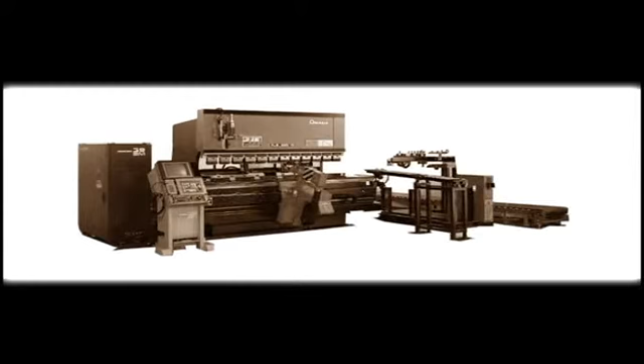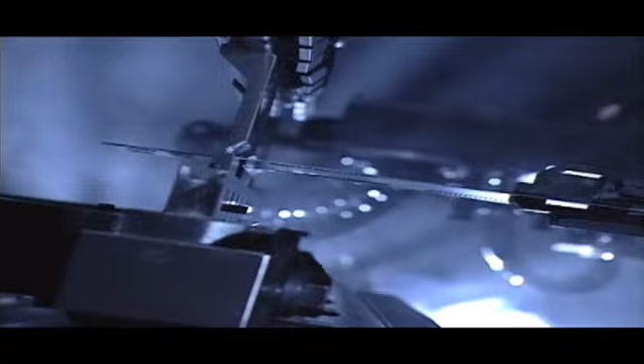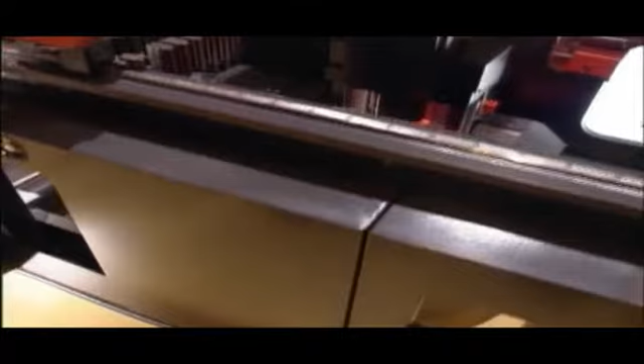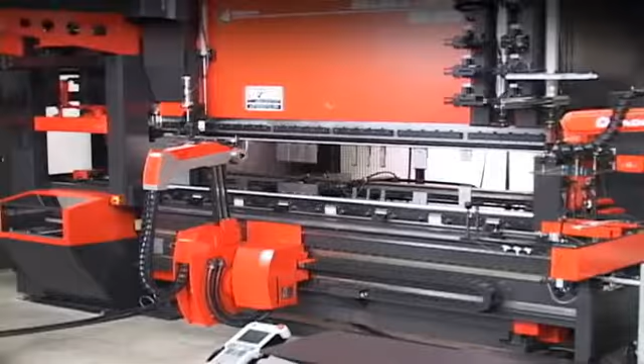20 years have passed since the release of the Bend-O-Matic BM100. It is this bending robot system, developed by Amada, that has brought about a revolution in the bending field by automating the bending process. This process used to rely on a worker's hunch and skills, and has evolved into a networkable, more automated system. In 2006, the core of BM100 was reborn with significant changes, creating the Astro II 100NT cell.

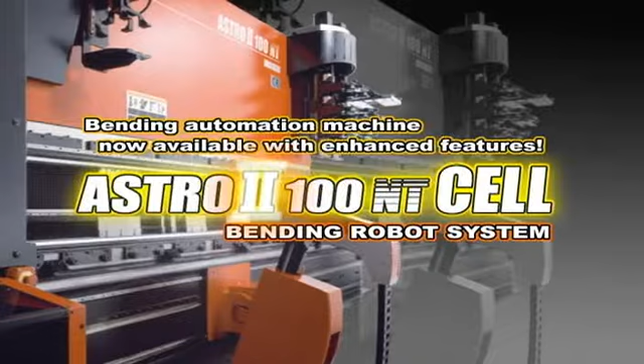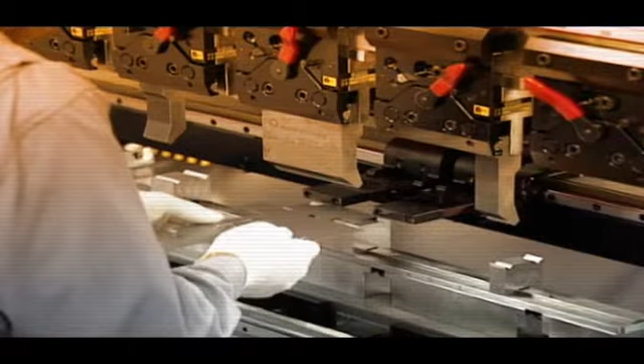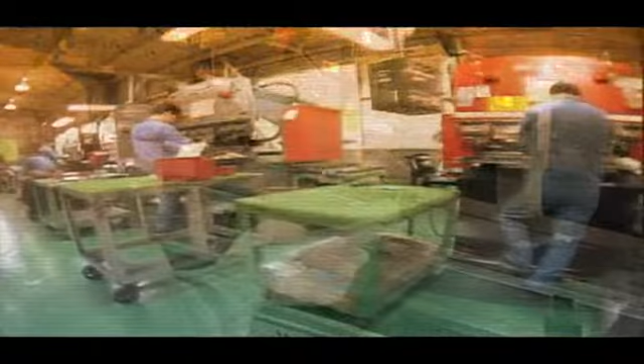If products requiring time-consuming setup increase in quantity, the productivity will be seriously affected. Especially, the bending process is likely to become a bottleneck. Making this process more efficient is the biggest key in improving productivity.

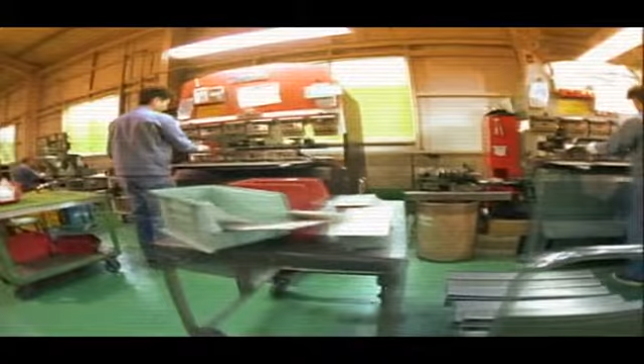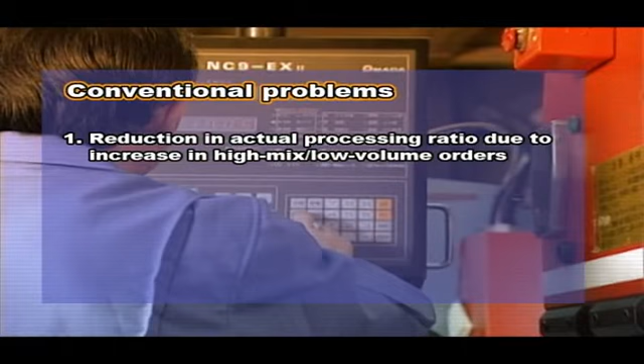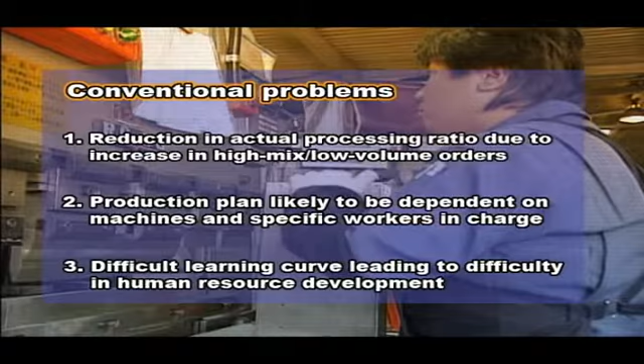With the conventional bending process, there were various problems such as: 1. Reduction in actual processing ratio due to increase in high-mix, low-volume orders. 2. Production plan likely to be dependent on machines and specific workers in charge. And 3. Difficult learning curve leads to difficulty in human resource development. In particular, the increasing high-mix, low-volume production was the major cause that prevented productivity from improving.

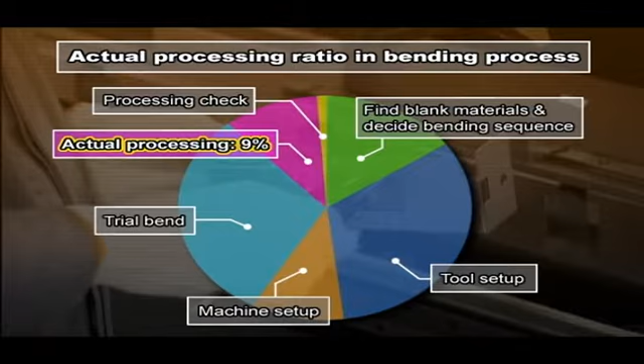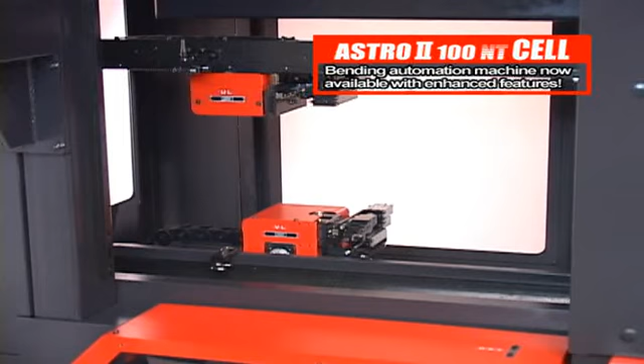The new bending robot system, Astro II 100NT cell, has reduced the shop floor setup and achieved outstanding improvement in productivity by adopting various new functions, automating the process, and making the process intelligent. The Astro II 100NT cell is the ultimate embodiment of the shift from using robots especially for mass production to using robots especially for high-mix, low-volume production.

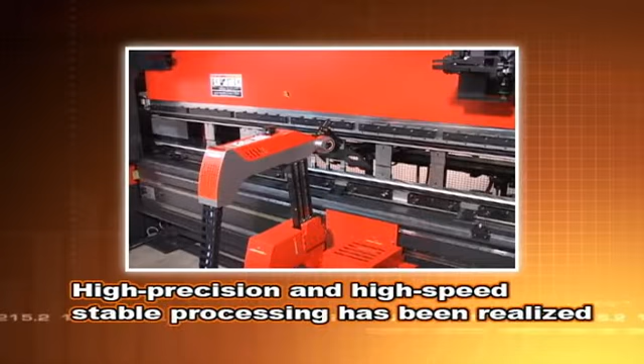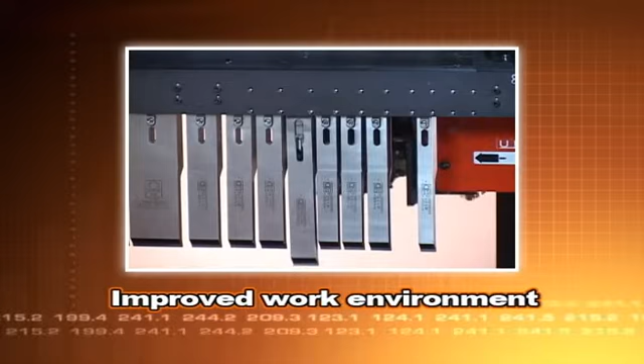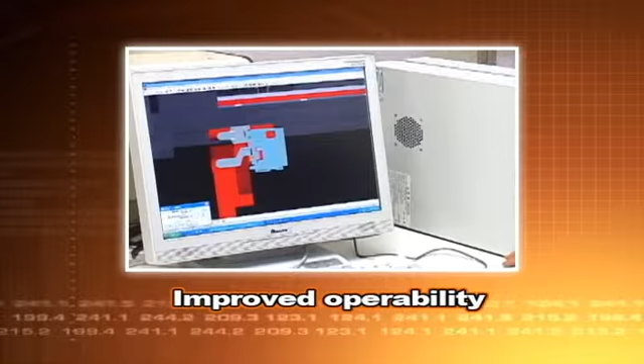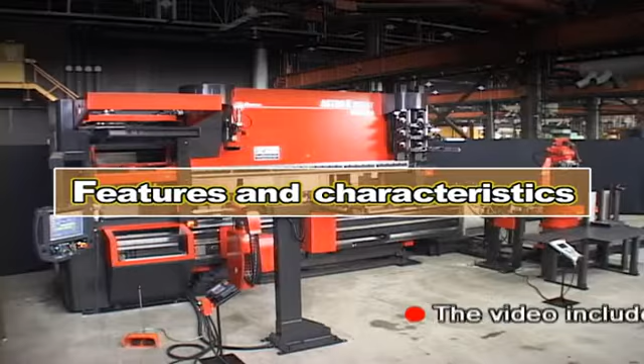The Astro II 100NT cell was developed with the concept of 1. High precision and high-speed stable processing. 2. Improvement in work environment. And 3. Improvement in operability. Now, let's look at the functions and features of the bending robot system Astro II 100NT cell, in the order of these development concepts.

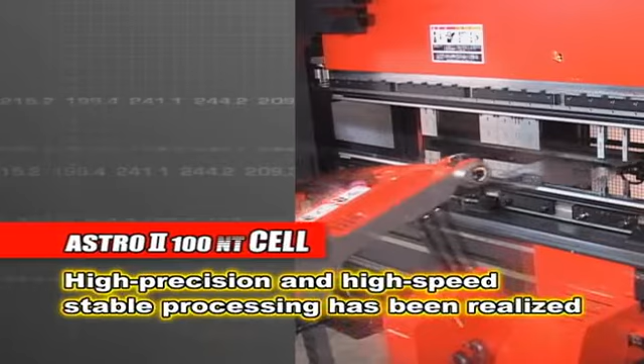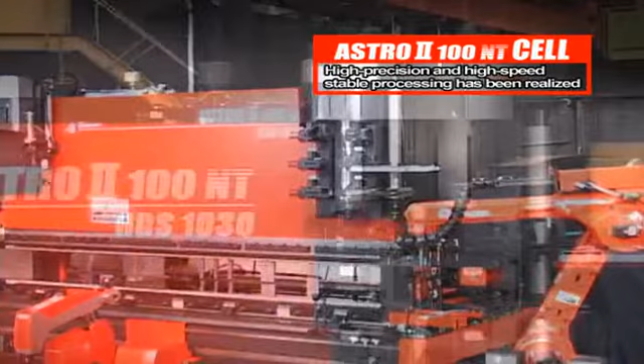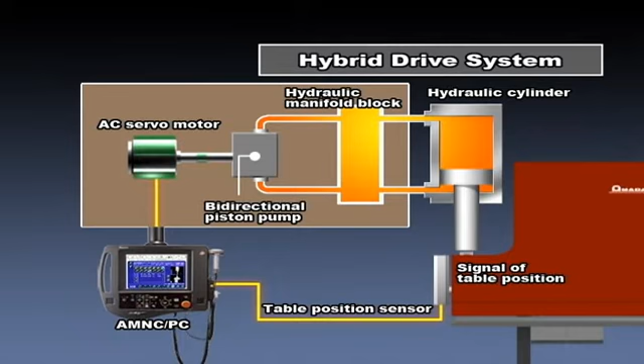The bending portion of Astro II 100NT cell is incorporated with the HDS series machine, the next-generation bending machine with high reliability and high achievements. Amada's unique hybrid drive system was adopted for the ram motion. The hybrid drive system uses a highly responsive AC servo motor to control hydraulic pressure. This has contributed to achieving a significant increase in the processing speed and high positioning accuracy to the micron level. Furthermore, the ram motion is made to be adjusted more finely to the 0.001 mm level in the D-axis.

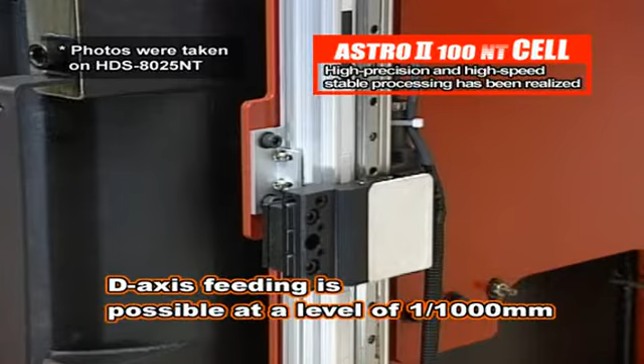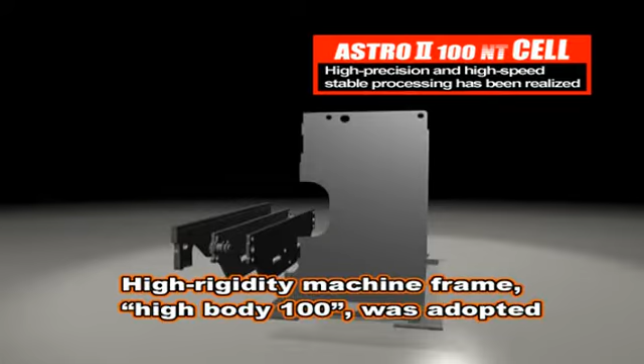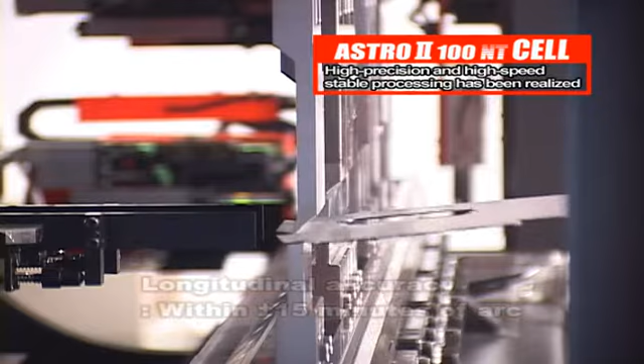For the machine frame, a high-rigidity frame called High Body 100, which was newly designed pursuing higher bending precision, was adopted. The open height was extended to 600 millimeters, which is 100 millimeters longer than in the past, so the machine can do various bending jobs. Moreover, the hybrid crowning system was incorporated at the center of the lower table to prevent middle flex from occurring. This system enables equal distribution of pressure across the table and keeps high longitudinal accuracy of within plus-minus 15 minutes of arc.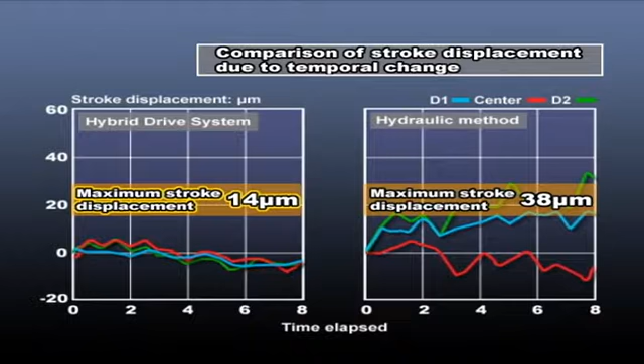Also, the hybrid drive system, which is less susceptible to the effects of oil temperature increases, maintains high precision for a long time, with a maximum temporal change of 14 micrometers in 8 hours. So, the system generates minimum loss of energy and waste of hydraulic oil and maintains a favorable operating environment. Based on these important basic functions, the Astro II 100 NT Cell has introduced many advanced mechanisms that realize stable, high-speed and high-precision processing.

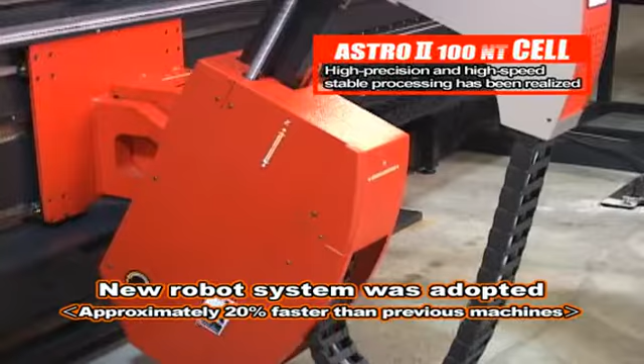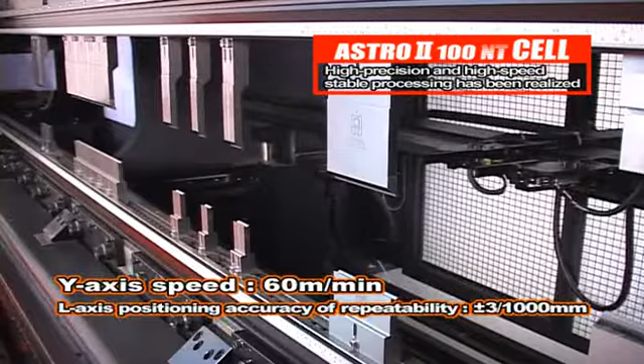In the Astro body, a new robot system with a renewed design was adopted. This system enhances the access speed by approximately 20% compared to the past. High productivity will be achieved by using both this system and a high-speed and high-precision back gauge that achieves a y-axis speed of 60 meters per minute and an l-axis position repeatability of plus-minus 0.003 millimeters.

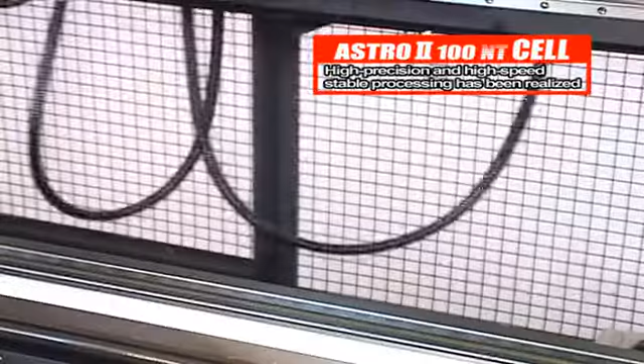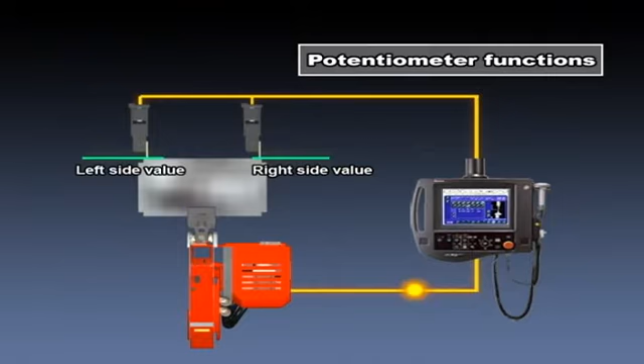The back gauge is equipped with a high-precision potentiometer that detects changes in workpiece travel distance and controls the robot movement. The potentiometer constantly monitors precision by repeatedly giving gauging directions to the robot until the back gauge error meets the processing standard. This enables stable, high-precision processing for a long period of time.

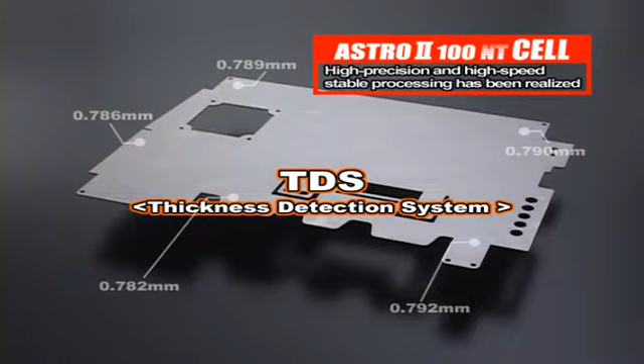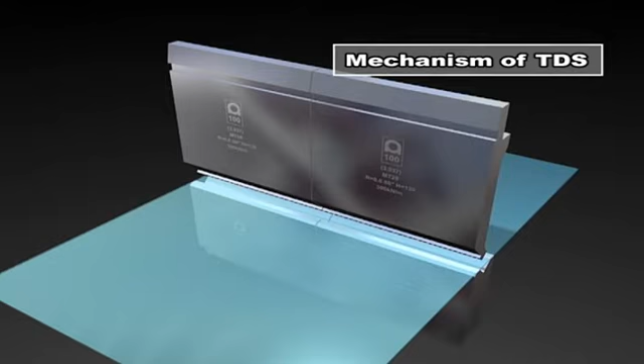Moreover, the ASTRO II 100 NT CELL adopted the thickness detection system, called TDS, which reduces thickness variation impact on angles and achieves high-precision bending. TDS measures subtle differences in sheet thickness with a stroke distance from the pinching point and controls the D-axis. TDS quickly responds to thickness changes and constantly adjusts load to an optimum value.

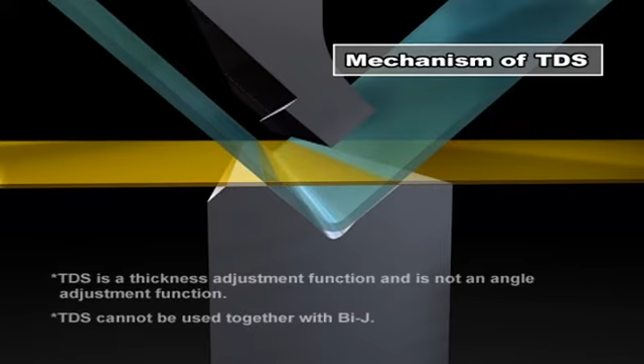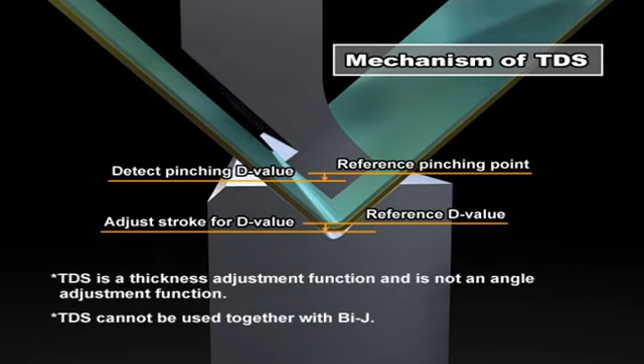In test processing using TDS, it was proved that TDS's thickness adjustment feature works effectively even for sheet thicknesses with just 0.03 millimeter difference.

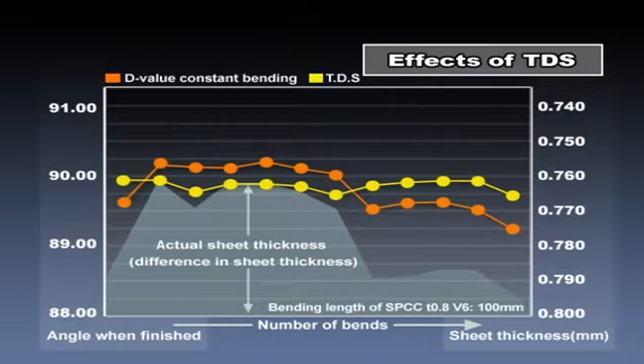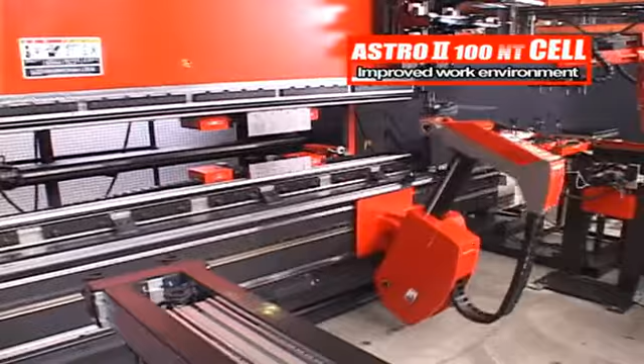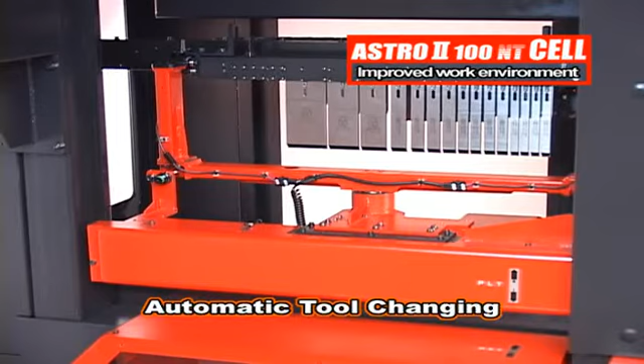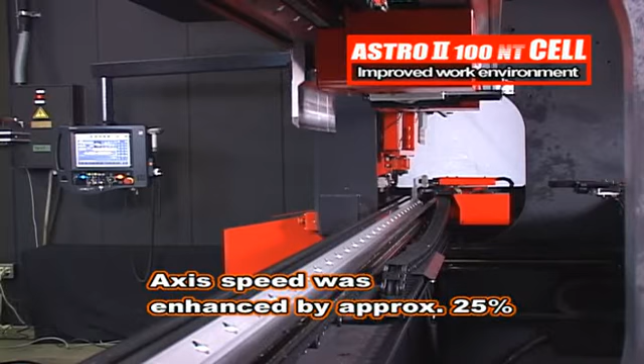A high-capacity new auto tool changer mechanism, which holds a much larger number of tools and stores more than 10 kinds of tools, contributes to significant improvement in tool setup efficiency and productivity. The enhancement of the axis speed by approximately 25% has greatly shortened the tool changing time. An accurate and speedy tool change, which previously could only be done by skilled workers, can now be done automatically.

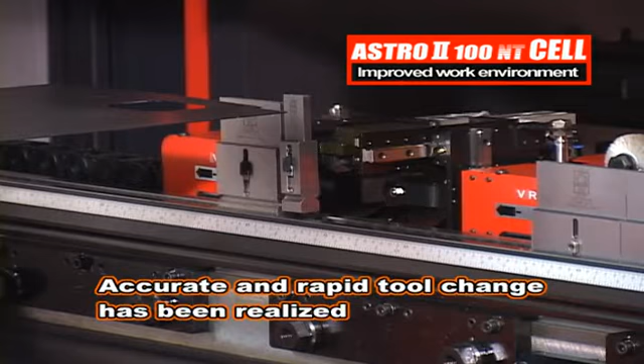In addition to a punch and die auto-invert mechanism, the Astro II 100NT cell is equipped with a punch and die auto-reverse mechanism that reverses the punch and die positions by 180 degrees. This allows more flexible production with minimum setup.

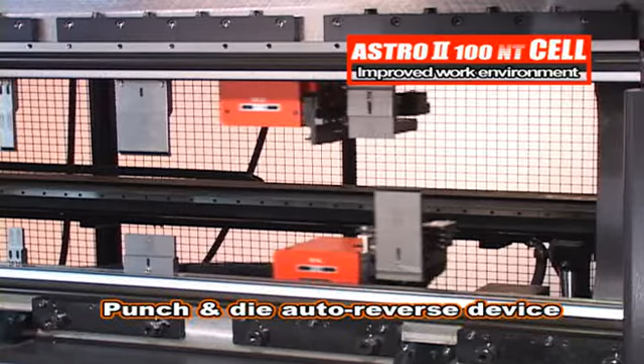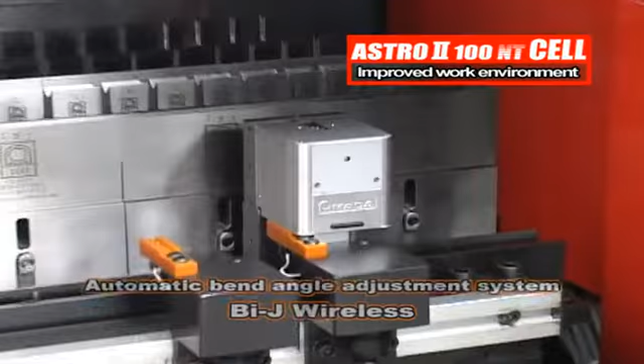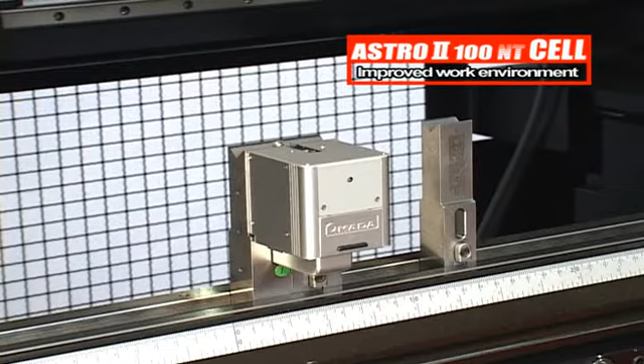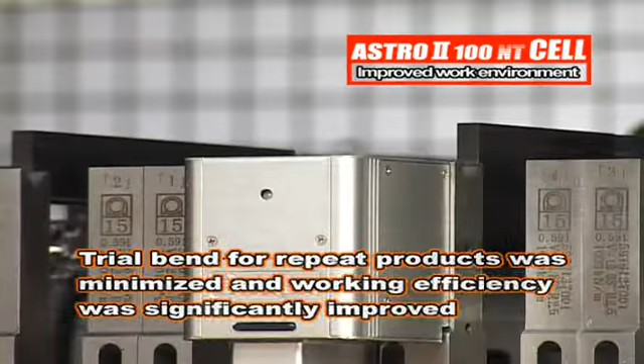Furthermore, a bending indicator, Bi-J, can be used on the automatic tool changer by making the angle sensor wireless. With the speedy angle detection function, by use of an inline spring-back method, and the high-precision bending angle correction function that can adjust angles to be within plus-minus 15 minutes of arc, trial bends for repeat orders, which used to be essential in the past, were reduced to the minimum, and work efficiency was improved dramatically.

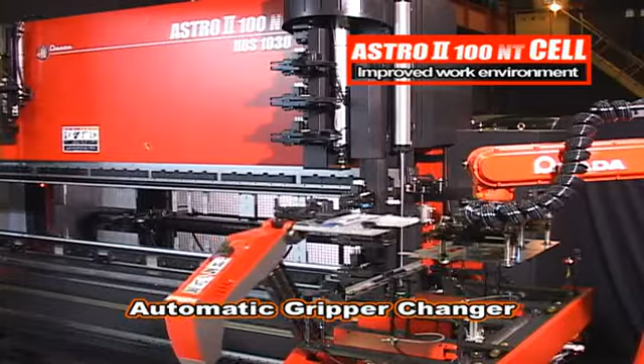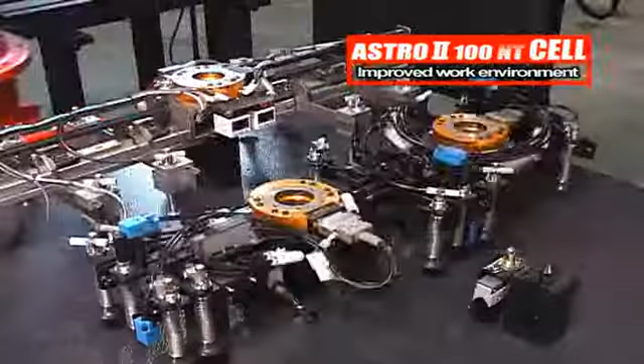Additionally, the Astro II 100NT cell has a variety of new functions, including the new automatic gripper changer called AGC, which can hold 6 grippers maximum. The Astro MP20 automatic hand changer called the AHC mechanism, which is a load-unload device with a high-speed cycle of approximately 25 seconds with significantly improved functions.

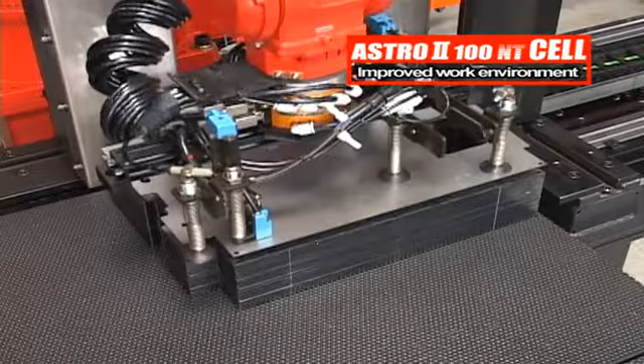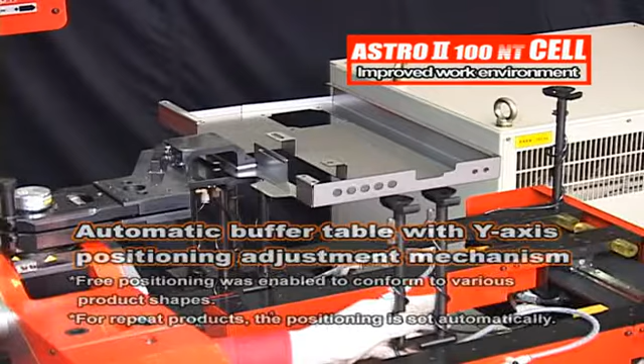A load correction mechanism that fine adjusts the robot's material loading position by measuring the position of the blank materials with a CCD camera. And a newly designed automatic buffer table with a Y-axis position adjustment function to respond to flexible position changes. The adoption of these new functions will ensure your production is more efficient.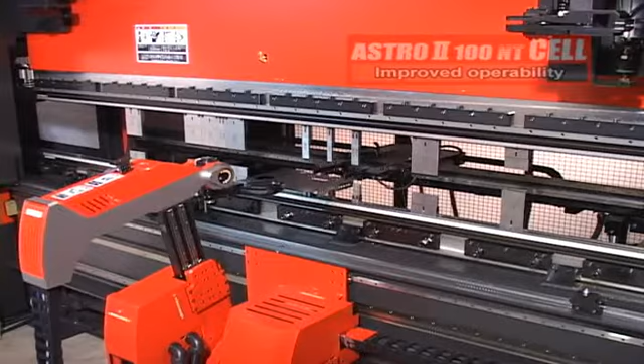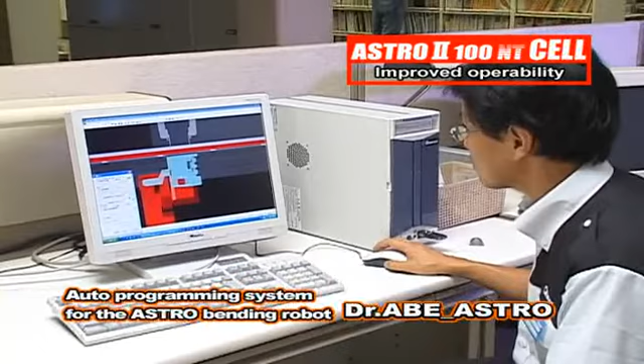With bending robots performing complex 3D motions, the creation of the working data is also important. Dr. Abe Astro is a next-generation automatic programming system developed exclusively for the Astro series. It can automatically create all data necessary, from tools to use, bending sequence and tool layout, to gripper selection and robot motion. Dr. Abe Astro has realized efficient offline programming in the office.

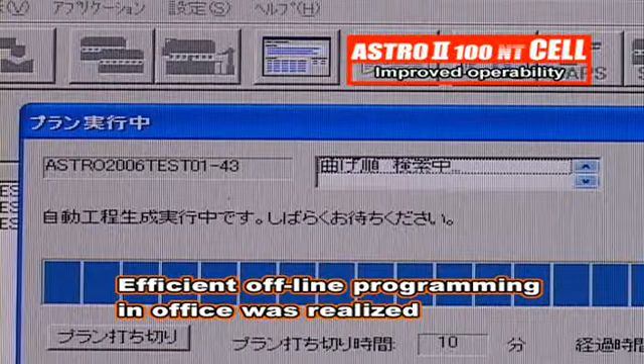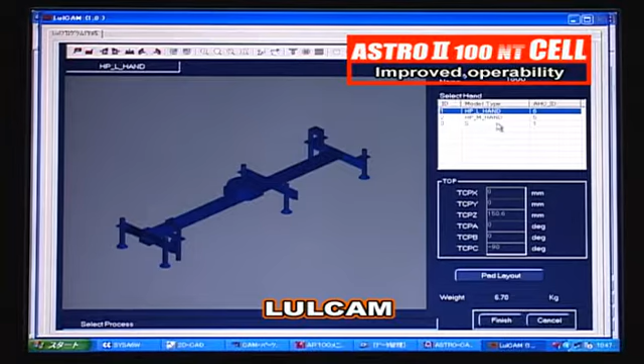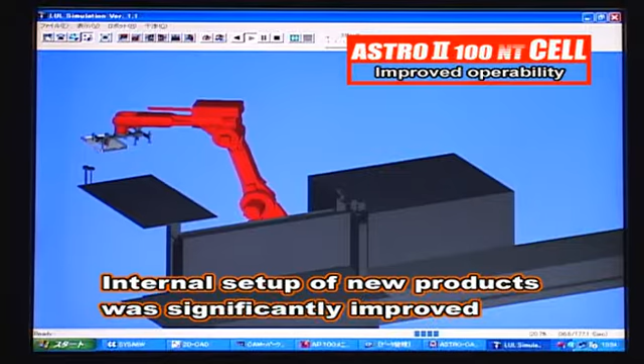In addition, new loading-unloading software exclusively optimized for the Astro II 100NT cell has automated the loading-unloading of products. The simulation function, which precisely reproduces the actual machine motions, has significantly improved the efficiency of internal setup for new products, which would have taken a lot of time in the past.

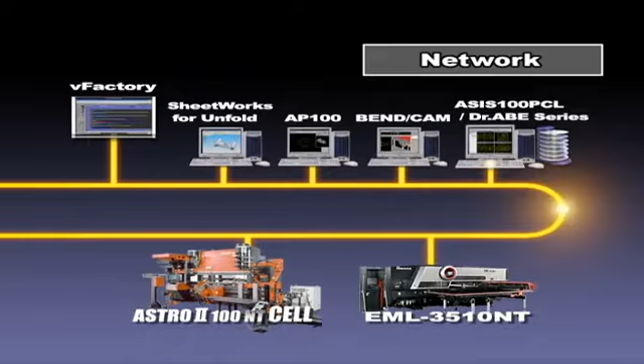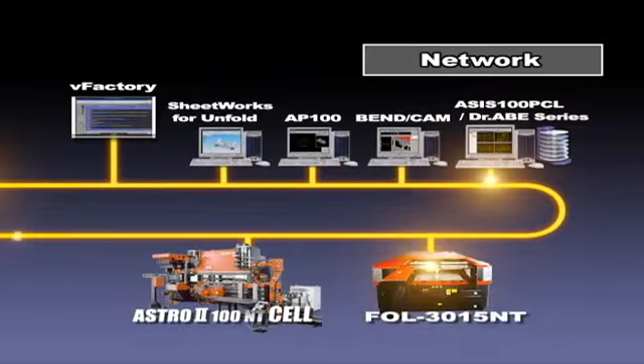The Astro II 100NT cell can be connected seamlessly to Amada's network system. It can respond easily to automation demands by adding state-of-the-art hardware and software. The Astro II 100NT cell can also be used promptly as a machine centering in the Virtual Prototype Simulation System, abbreviated VPSS, which aims to realize new digital manufacturing.

The Astro Ii 100NT cell is the ideal automation system, capable of responding flexibly and rapidly to various production styles, including high-mix, low-volume production and long hours of continuous operation. The future of bending automation starts with this Astro Ii 100NT cell.